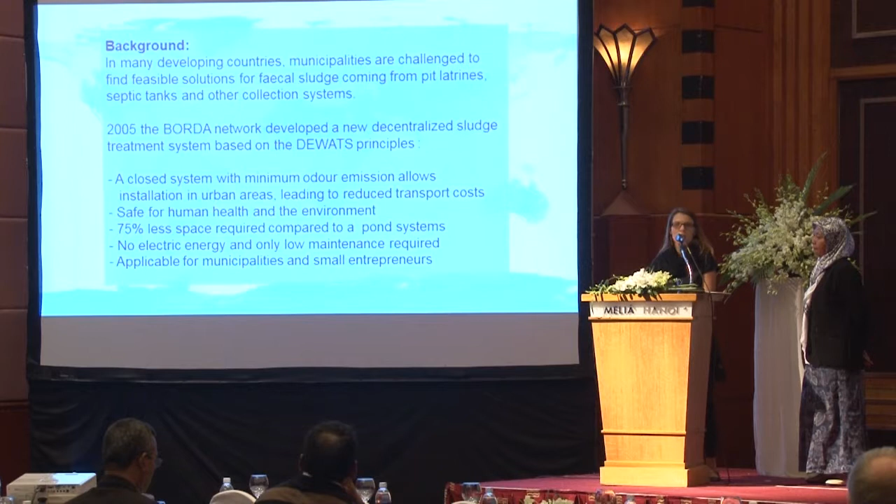As you know, the topic for today is how can municipalities ensure safe and healthy fecal sludge treatment. This is the question, and our experience from BORDA Indonesia started about 10 years ago, so this is quite an interesting presentation to see how things can develop over one decade.

In 2004-2005, BORDA developed a demand-responsive sludge treatment plant for municipalities in order to complement the DEWATS systems we are implementing in our community-based sanitation (CBS) projects, to make sure that the disposal and processing of septic urban sludge is done well.

The treatment plants we developed are basically for small and medium-sized cities, and they collect septic from urban areas, on-site systems such as septic tanks and pit latrines, but also from our CBS projects. They include biogas generation opportunities as well as composting opportunities.

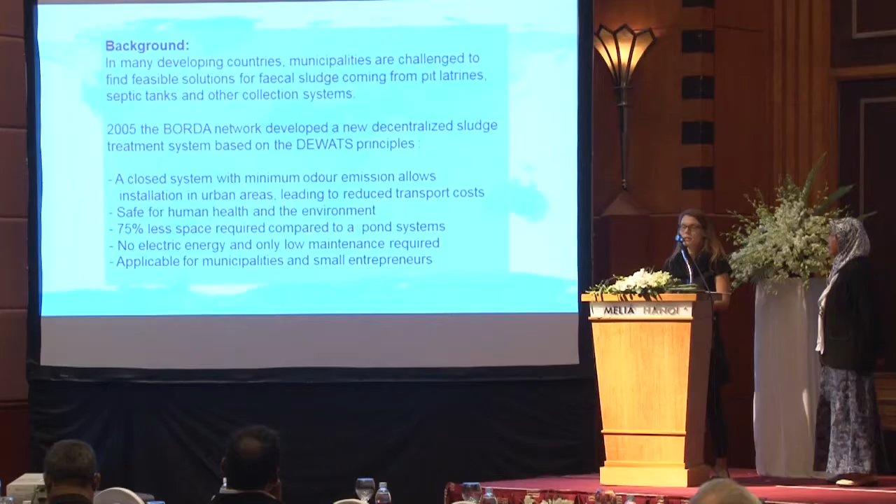In contrast to the existing common treatment plant systems at that time, our systems, as you can see on the screen, allow emission of odor to a minimum because it's a closed system. It's easy to install in urban areas, which reduces transportation costs of the sludge. This leads to an increase of human health and environmental protection. They also need less space than common pond systems, and less or no electricity, with low maintenance required.

So what were the challenges we faced, and still face, in implementing such treatment plant systems in Indonesia? I think in most presentations these aspects were mentioned already, but I'll highlight them again. Depending on the different kind of system or location and conditions in the surrounding area, we need to consider this when creating or developing a system.

Besides, transportation costs are a key factor. Also, as you heard already, the disposal of sludge often happens illegally - it's just disposed into the rivers. Furthermore, there's a lack of regulations, so in Indonesia there's no clear structure of who is responsible for what. In some cities there are regulations, but they're not really connected and not enforced.

Besides, we need to think about how we provide incentives for the service providers, basically the private sector.

So to give you a short overview of the two projects we're talking about today: the first one is the project in Mojokerto, in East Java. In 2005, we implemented a sludge treatment plant there for about 120,000 inhabitants.

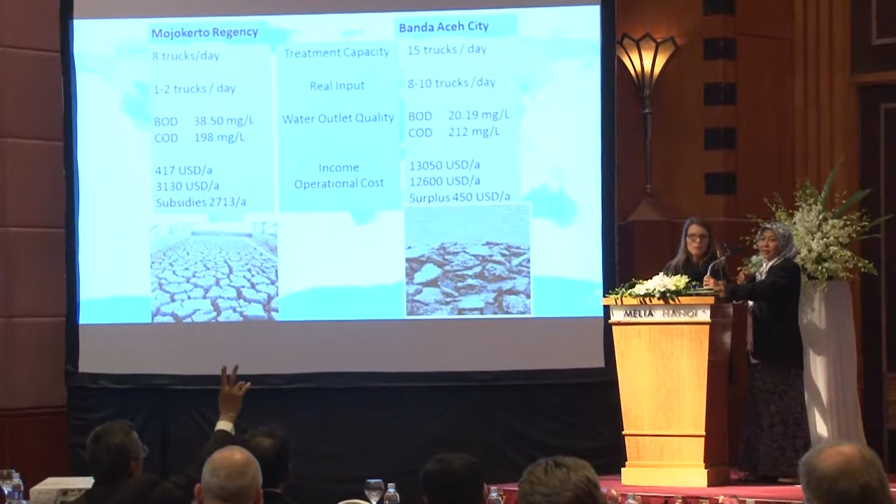Hello, thank you for your presentation. I'm Shay Saxena from University of Delaware. I think you mentioned that these treatment plants are within the city limits, and I just want to know if there are any odor problems which the city faces, and if there is any backlash after a decade when you have reached the potential for wastewater treatment plants.

Thank you for the question. In the first slide, we mentioned already that 80% of our treatment plants is a closed plant, so this is an anaerobic system. Then the effluent will flow to the planted gravel filter, the first open system, and then the maturation pond. With this system, one advantage is that the odor is already reduced. Anyway, the treatment plants are located at the dump site, so still nobody complains about the odor.

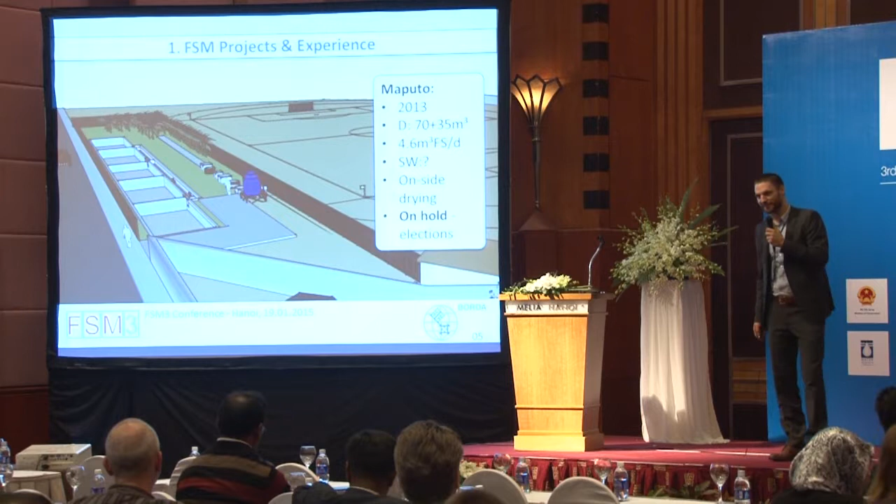That's a different project now in Maputo, Mozambique, again planning with WSUP. Really, the treatment plant is really directly, or was planned to be directly inside the community next to a soccer field, which you can see there. Unfortunately, it's on hold right now due to different political reasons which were coming up. So we have the project right now in the drawer, and we're trying to get it implemented once these problems are solved.

Okay, incoming sludge. Yes, I was saying that already. That is a problem with accumulation of sludge inside the digester. Because we're using gravity desludging, and that way we're not able, by the force of gravity, to desludge all the solids in the ground, so we have an accumulation of sludge. I will show you that as well.

As well here, oh, that was the description here. So over time, we're having that volume created inside the digester. We have more sludge which cannot be extracted. That is sometimes content of sand, and we have as well a lot of already suspended or very digested solids which are just accumulating there, doing nothing basically.

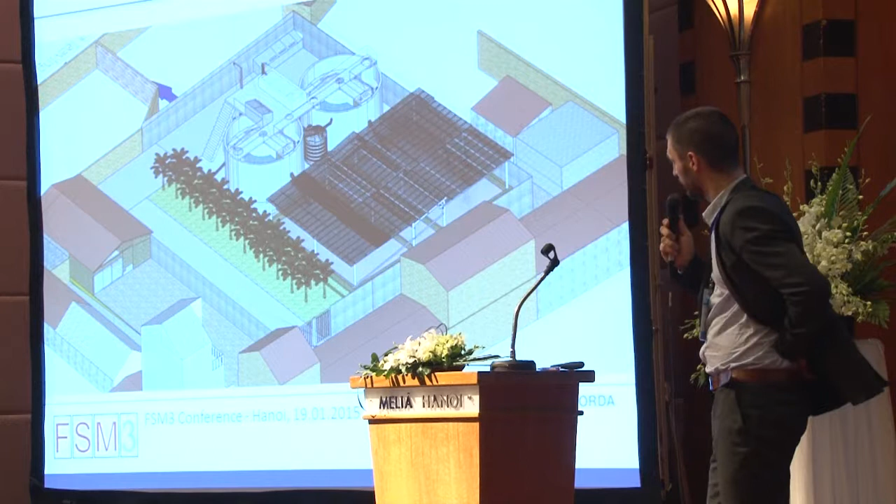Thank you for your drawings. I would like to know how big the size of the area. How big again? The size, land. Oh, the land, okay, very good point. Also, depending on the systems we are talking about, let me show you the website here. That's a system which is planned in Antananarivo, really in the urban area, and we really try to keep it very, very compact. This is 25 by 25 meters, where we as well have a high groundwater level, so the digesters are constructed above ground with displacement tanks on top of the digesters.

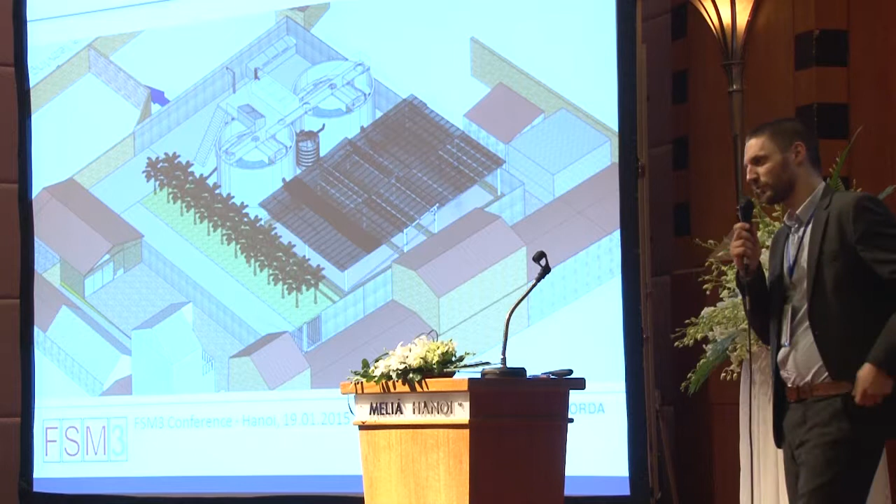So it's really ranging from what land is available. The more land we have available, and we have low prices as well for the land, it's good to space it out more to have, for example, more drying space. So it really ranges. I can't tell you right now the number of square meters per fecal sludge treated.

Thank you. And there's the last question. So from your presentation, I understand that the main reason you wanted to switch to anaerobic digestion systems is because the ABR system did not work well, but you can make the same argument for anaerobic digestion-based systems, and in fact they're much more complex. Another point is if the starting material is septic sludge, that's already sludge that is anaerobically digested. So you are already losing the biogas, the readily digestible material that's already lost.

And so from your presentation, I understand that one of the driving forces for choosing the anaerobic digestion is also the biogas generation. But in the end, I do not know if this system would be feasible or if it would be an improvement over the first system that you started.

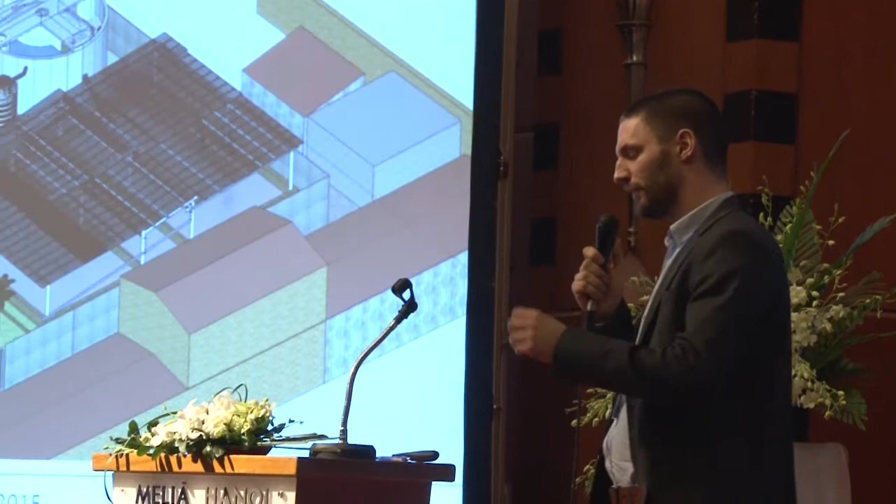Thanks. Well, first maybe there was a misunderstanding with the ABR, because whether it's ABR or biogas digesters, we have both anaerobic systems. The ABR in this case is only identified as not suitable for peak loads, since it is forcing the sludge all the way through the whole volume, flushing out the sludge. So that's the reason why we are right now not sticking with the ABR.

And with the double biogas approach, we are trying to accumulate or trap most of the sludge in the first digester. We have a stabilization of the effluent anaerobically in the second digester. So that is the major motivation. And we have a digester which is more resilient to peak loads. So we still have solids which are accumulating at the bottom, and if a peak load is coming, it is not flushing out the sludge right away into our irrigation field.

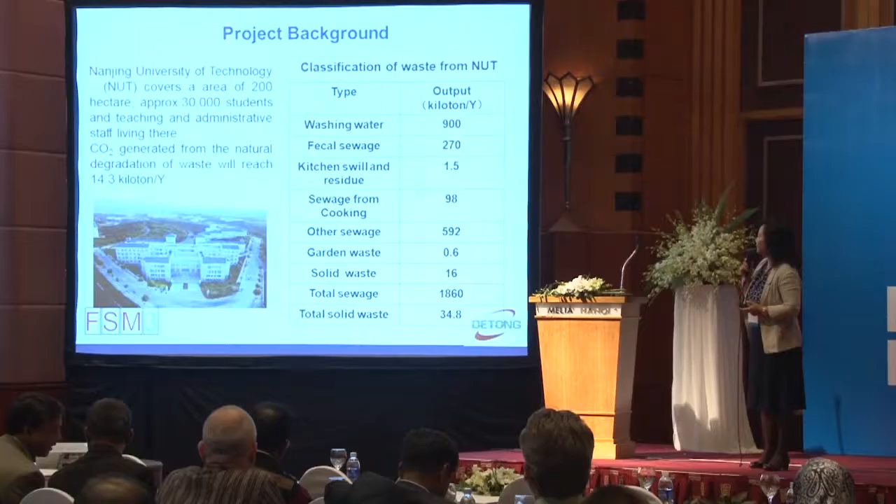So in this project, I want to introduce one of our projects, the installation of a biogas project at Nanjing University of Technology. You can see they have a lot of organic waste, so we use the fecal sludge and the straw. You know, in China they have so many problems with straw, rice straw. They burn it, making very heavy pollution. So the Chinese government, the agriculture ministry, wants to look for solutions: how to treat the straw and resolve this problem.

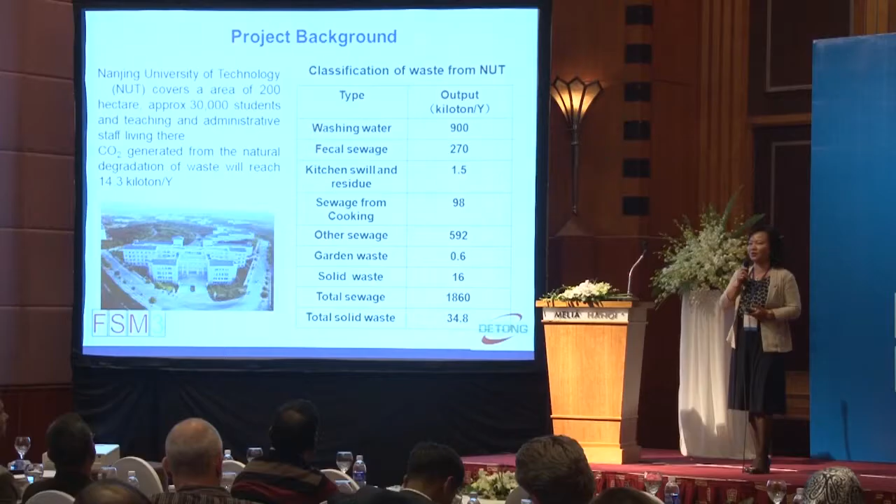So we got this project. We want to co-ferment it together with fecal sludge from this university campus to make biogas. We upgrade the produced biogas to methane gas to drive cars and buses for this university. And the effluent from the biogas we have used for fertilizer, and with the liquid phase we have also done some research work to produce high-concentration nutrient solutions for agriculture.

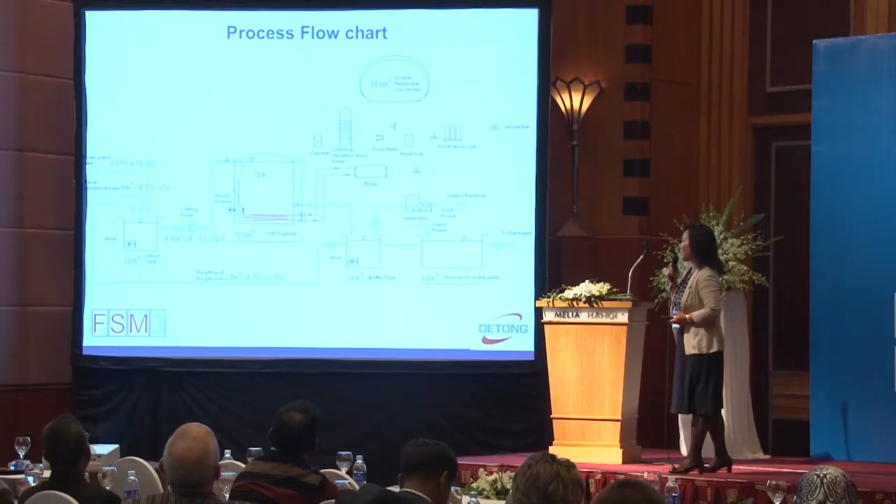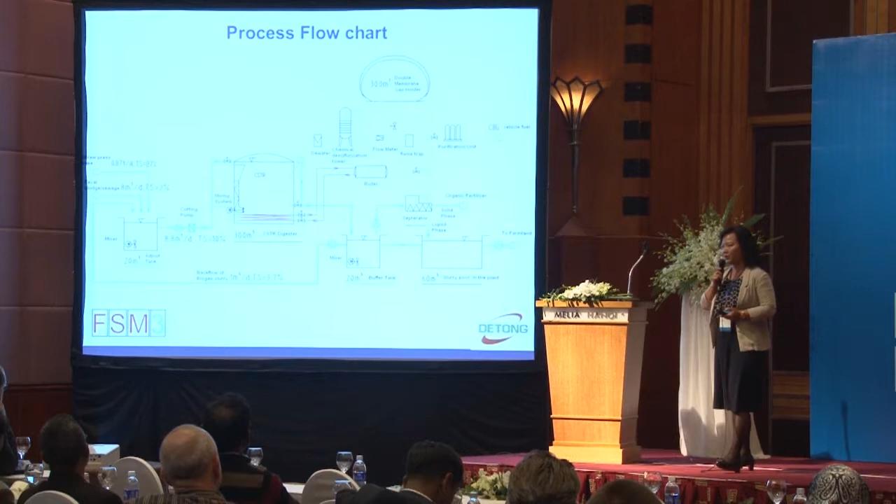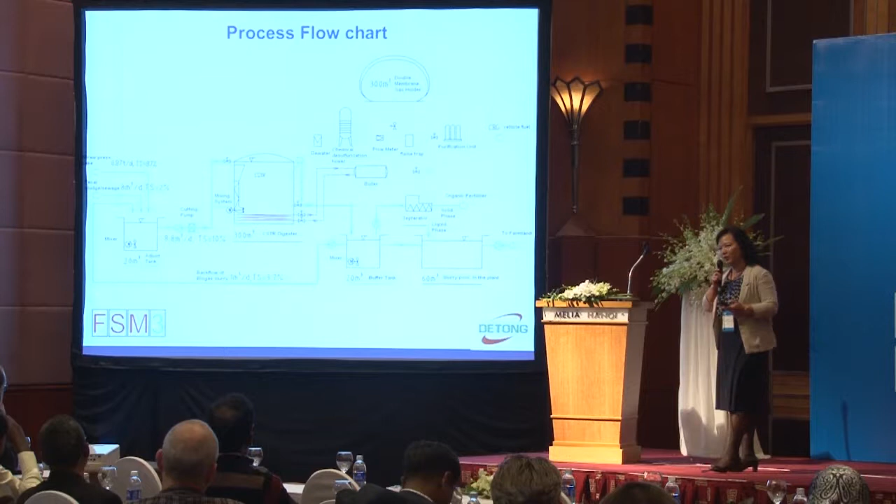Okay, we use a 300 cubic meter CSTR anaerobic digester. What's CSTR? Continuously stirred tank reactor. We have used innovative technology with a hydraulic mixer system together with a gas mixer system. We have a special pretreatment system for the straw, and very good technology for the separator after fermentation.

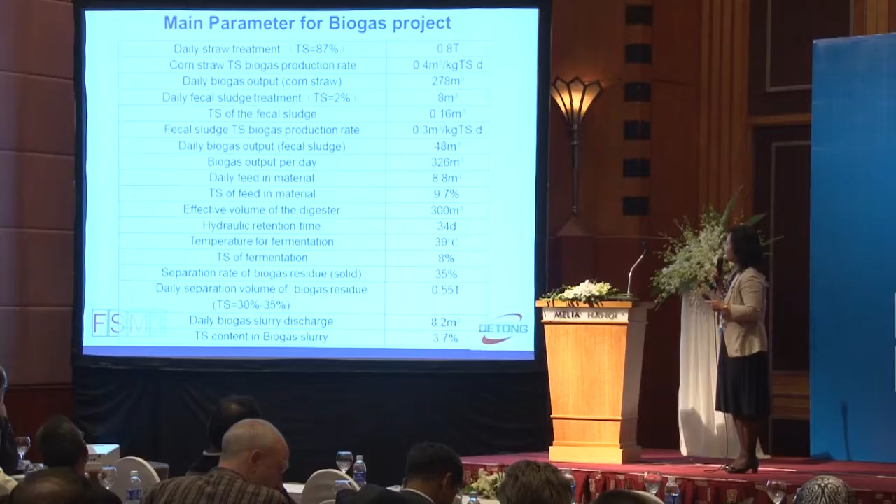So these are our main parameters for the biogas digester. You can see the straw treatment with TS 87%, very dry, about 0.8 ton. We have fecal sludge, about 8 cubic meters per day. So the total input material is about 8.8 tons and cubic meters per day. We will produce about 330 cubic meters of biogas per day.

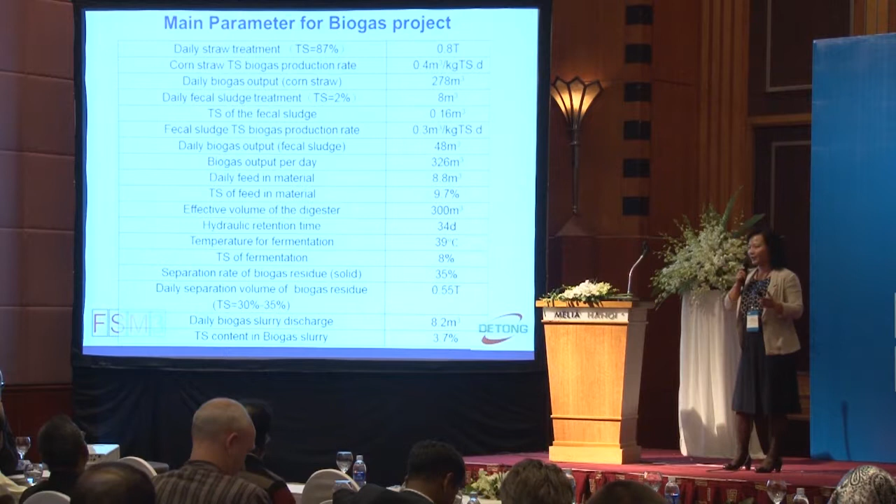This produced biogas will feed into the PSA system to produce methane gas to drive the car. The effluent from this biogas will produce solid biofertilizer and liquid biofertilizer. We use a temperature of about 40 degrees centigrade, mesophilic fermentation technology.

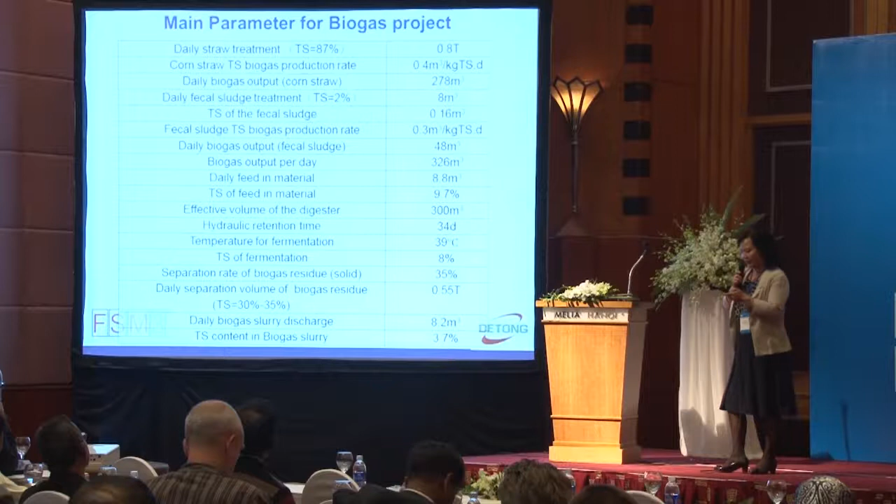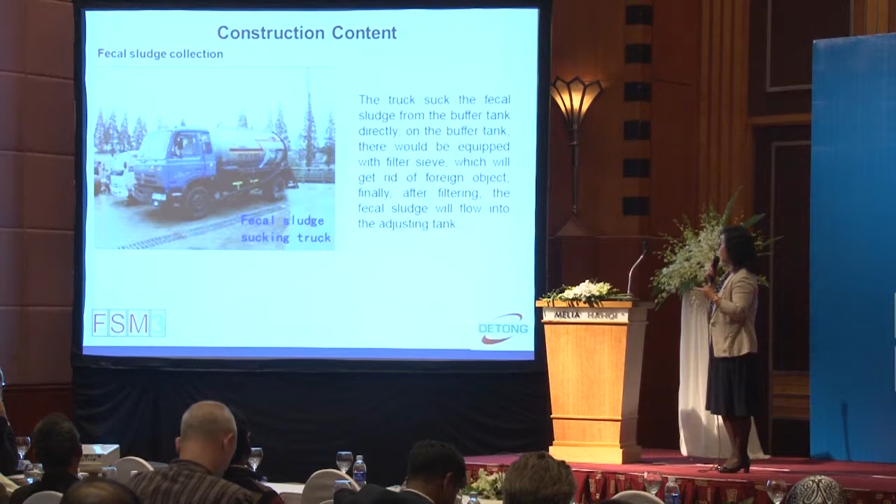So this is our raw material collection system. We have two kinds of raw material for co-fermentation. One is the fecal sludge, which we collect from septic tanks at different places in this university. We also collect the straw in packed bales to transport to our biogas plant. So this uses this tractor. We take the fecal sludge from different septic tanks and use a special sieve to remove foreign objects, these foreign particles.

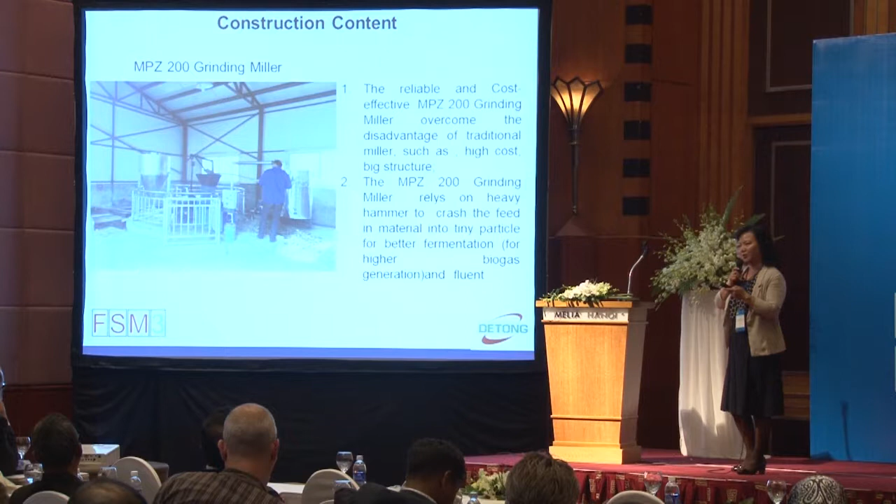This is also very important for the treatment of the straw. You know, this straw is very long, sometimes very difficult to treat. We have used special hammer mills from Germany, this know-how from Germany, to make the particles very small, less than 3 mm, as feeding material. We also recycle the effluent to increase the bacteria and get a very high biogas output.

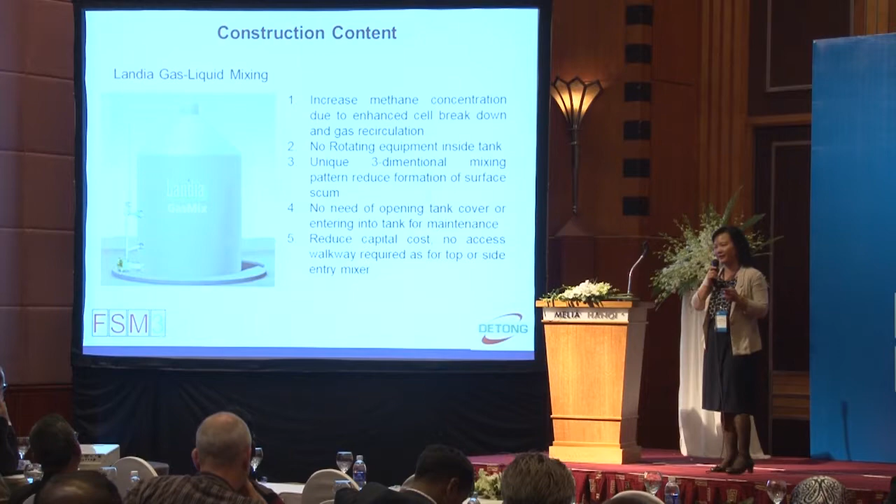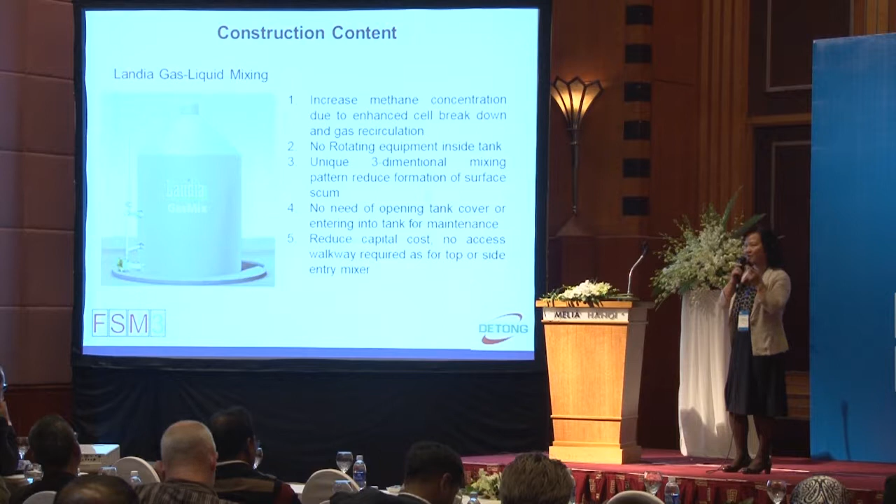This is also a special gas-liquid mixer. We call it gas and hydraulic mixer system integration, because in different areas of the tank, this straw is sometimes very difficult to mix, with a swimming layer. It makes a block in the digester for the effluent and influent. That's a big problem. We have resolved it.

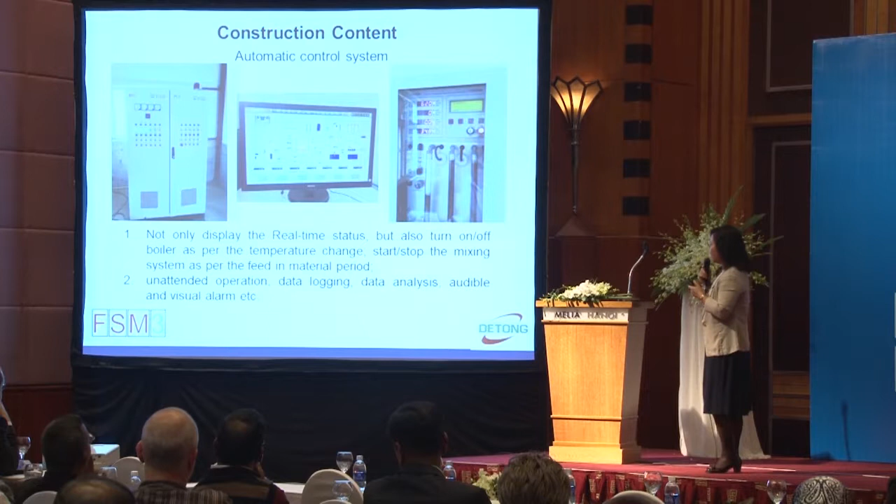We also have a membrane gas storage with 300 cubic meters. The produced biogas is stored in the membrane gas storage, and then goes into this control system. We also have an online gas analyzer for methane content, CO2 content, H2S content, O2 content, everything automatic. So this is some equipment for this biogas digester.

We finished this digester last year in July. After biogas digestion and storage, we use this PSA upgrading system to produce methane gas and drive the car. The methane content can reach 98%.

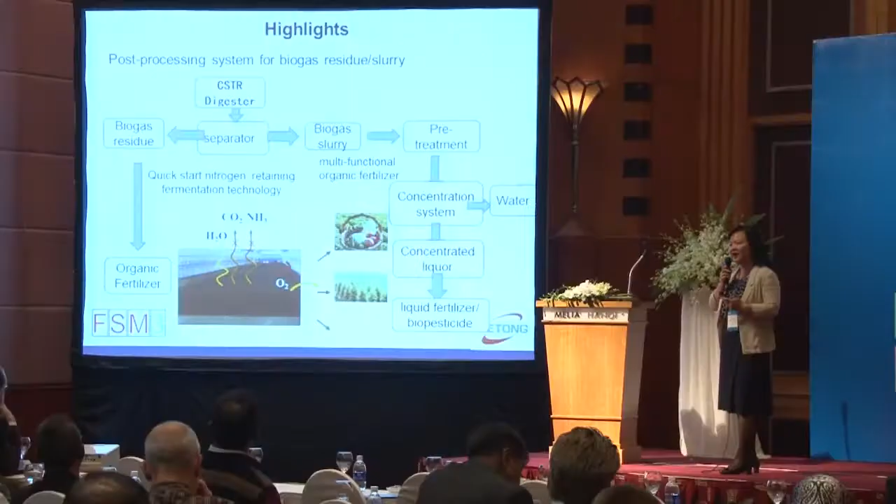So you can see this is also our output. Most important is what we can use from this output. We have gas, which we use for cars. We have solid effluent and liquid effluent, which we use as biofertilizer with very high value, much more expensive than normal compost. We have done scientific analysis with a project from the Science and Technology Ministry. We try to sell it for good money. We want this project to operate economically.

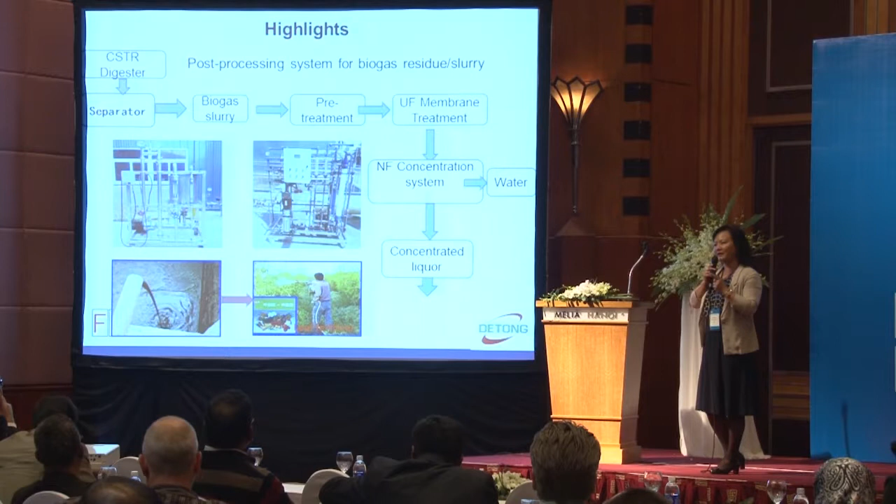That's most important, because the produced biogas can also be used to make electricity. But I think if you make methane gas, you can get 4 times the income compared to making electricity, anyhow in China.